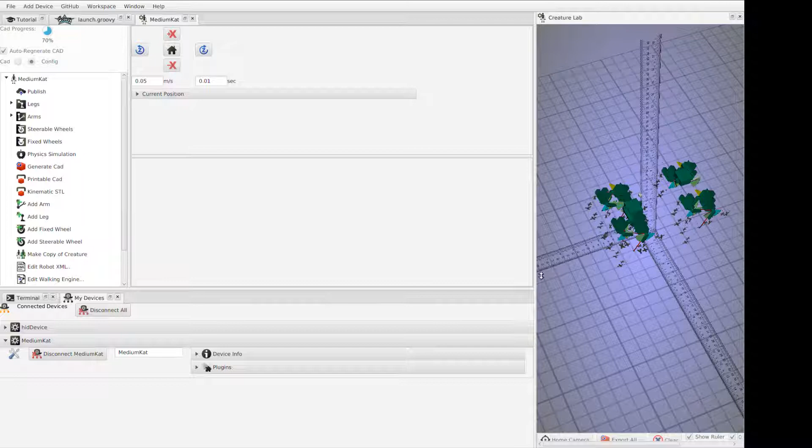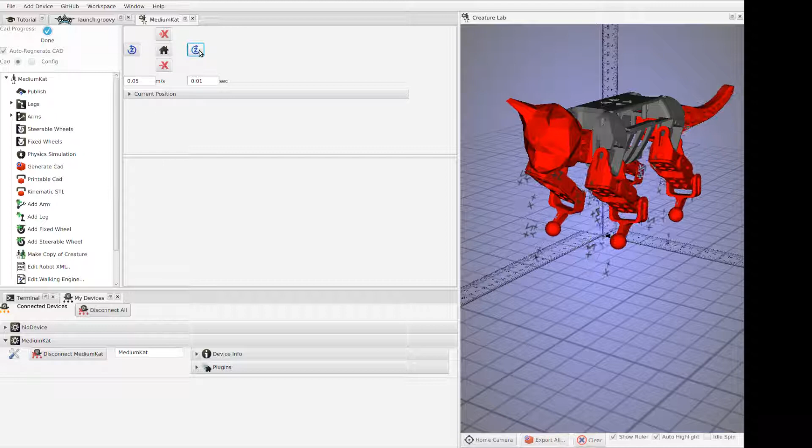Here, let me switch it back to full menu. There you go. And you can see our configured MediumKat opening up on the window here. Now, if you want to see the CAD, just click on the CAD button. And if you want to see your MediumKat walk, you hit this little plus button here, press and hold, and your MediumKat should start walking. There you go. To make him turn, you use the rotate about Z. Good. Walk backwards, turn the other way. Great.

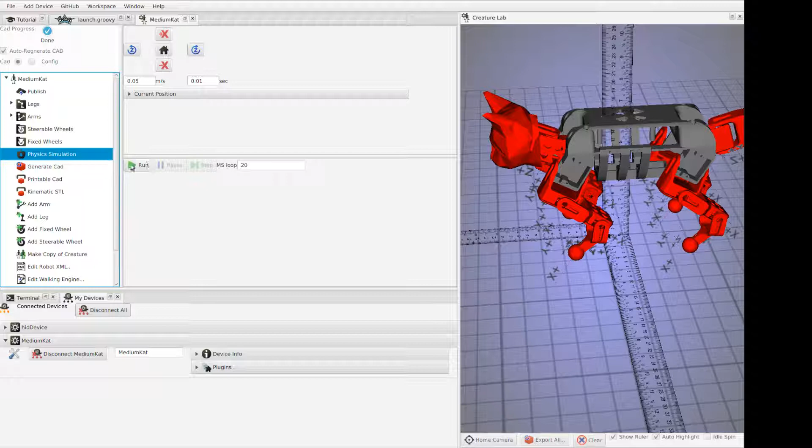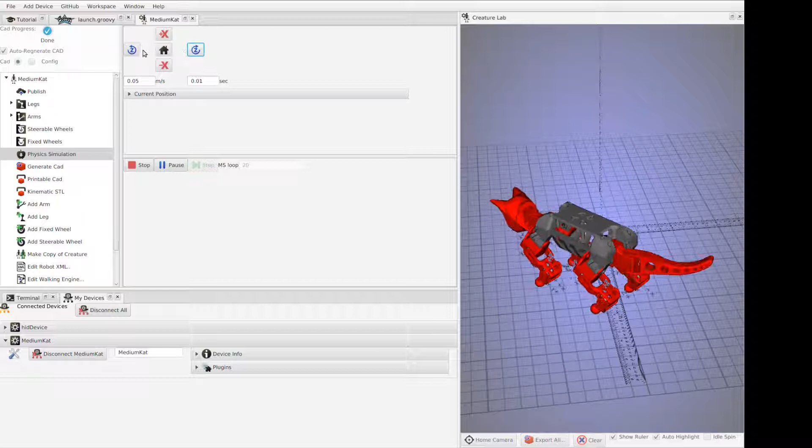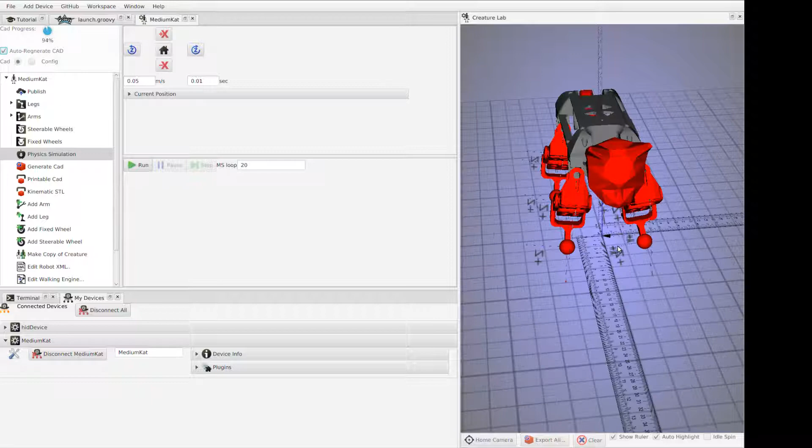Now we can see that our copy of the configuration loads up a cat. And in fact, if we wanted to, we can even check out the physics simulation by clicking on physics simulation and hitting run. Now when we make our cat walk, it'll walk inside a JBullet physics simulation. And turn, and turn the other way, and walk backwards. Cool. To reset our CAD, we uncheck the checkbox for Auto-Regenerate CAD, and check it again. That'll load up our simulated model.

Cool. Alright, so now we have a SmallKat. And the code that runs it is our code, as well as the configuration is our robot configuration. So you can see this is the one that belongs to me, with my name here. And you can see that we're running it by calling it here. Cool. Now, let's go back to our instructions and see what else we have to do. So we've just done step 1 and step 2.

Now, step 3. Print all the STLs. Cool. Done. I prepped this step ahead of time because that takes a while. It takes about 2 print beds on a Lulzbot Taz 6. And so each one runs for about 20 hours. So about 40 hours of printing.

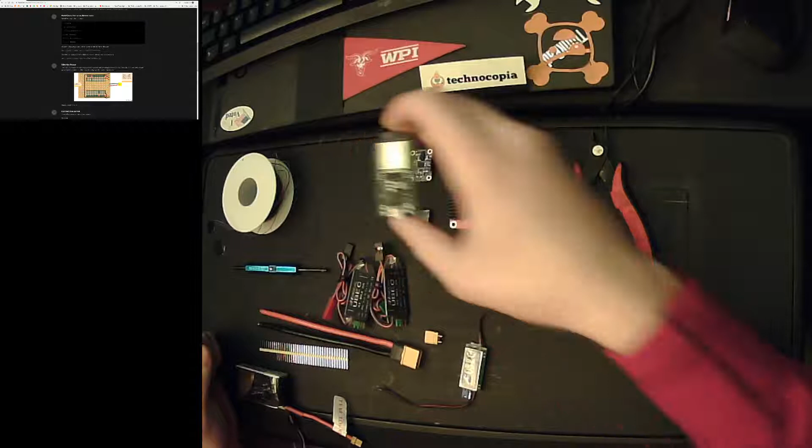Alright, next up, the ESP32 firmware. So, I'm going to switch over and show you the ESP32. This is the ESP32 dev module that we're going to be using inside SmallKat. The ESP32 is plugged into a robot interface board, just like that. And we're going to plug in the USB cable to program it.

Note that this LED comes on to indicate that there's power, and this one indicates that the 5-volt rail on the rib is powered. Put that there. Alright, so switch it back to the web browser.

Now you see we're going to want to fork the firmware that goes onto our ESP32. So we click on this link here. And just like the control code, we're going to fork ESP32 servo server.

Cool. Now, to program the ESP32, I'm assuming you have your Eclipse with the Sloeber plugin installed and the ESP32 toolchain set up. If you don't have those things, go set that up first. We have other instructions for that. We're going to assume your toolchains are set up for the moment.

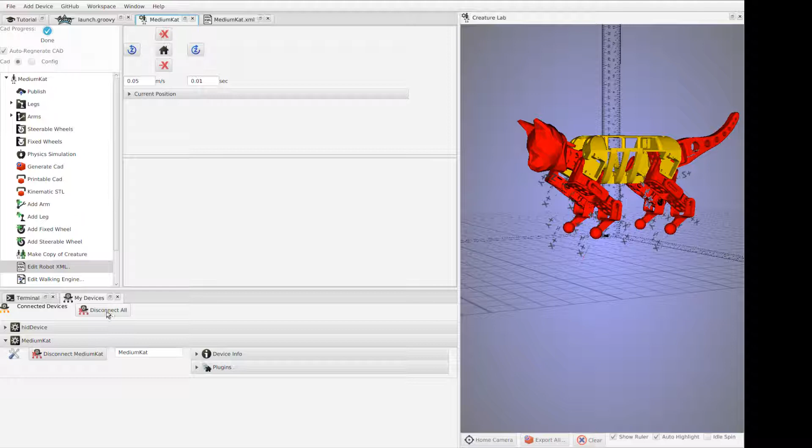Alright, once it connects to the Wi-Fi network, you should get an IP address, and the robot is ready to connect in Bowler Studio. So now we're going to pop back over to Bowler Studio. We're going to disconnect our robot. Clear it out of the 3D window and close the control panel.

Now, when we search for our robot, we should see a print statement in here saying it got a successful name check for the robot and a failed name check for the game controller, seeing as this is our robot, not our game controller. So, let's see if it works. Go ahead and hit run on your launch.groovy.

Oopsie, I closed it. That was not what I meant to do. We will reopen Bowler Studio. And right before I accidentally closed it, it had in fact connected. And let's try this again. So, I'm going to reset the ESP32, which you can see printing down here. And it's going to connect to Hephaestus 2. There you go, nice and connected.

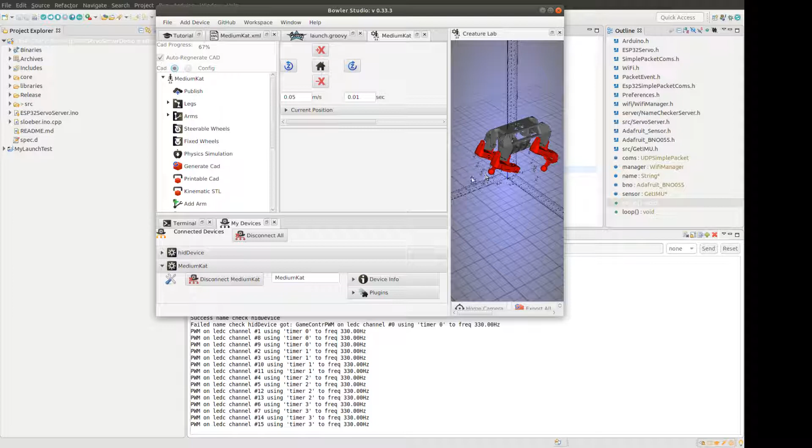So what you can see here is your ESP32 is now connected to Bowler Studio and is running the code. As the robot walks, we'll see the servos moving in real life. But since there's no servos hooked up yet, we can't see it.